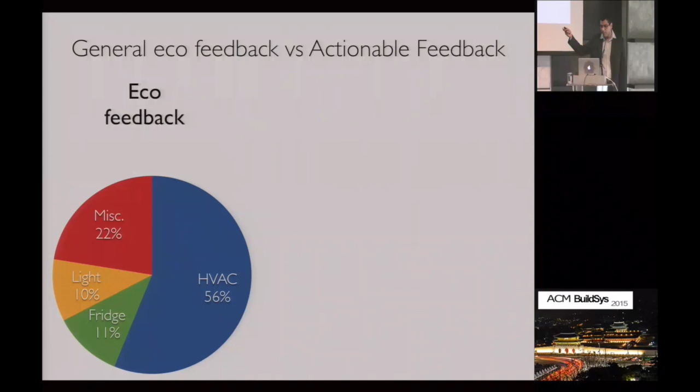Traditionally, when we talk about the feedback which NILM research comes up with, it's something like a pie chart, or the eco feedback which we see as the energy itemized breakdown. It might tell you that your fridge is consuming, say, more than your neighbor's, but does that really empower you to save on fridge energy consumption? Probably not for an average user.

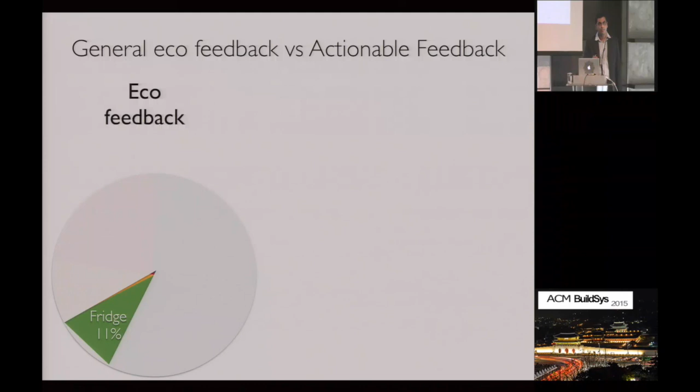What we actually need is actionable feedback, so that people don't only know about their energy usage, but they can also do something about it.

So this is the kind of actionable feedback we want to give in this work.

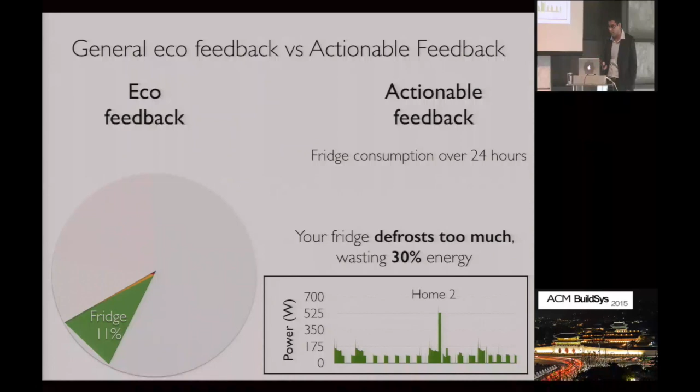When we talk about giving feedback, our basic approach is that instead of stopping at the power trace or the energy trace, we look at certain specific features from the power trace, such as the length of the duty cycles or the actual power value of any given appliance.

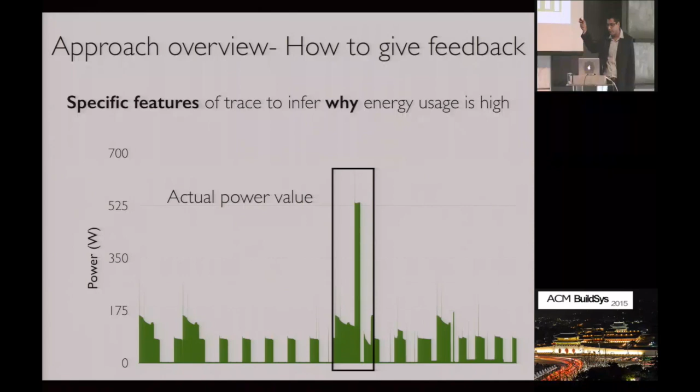I'm going to focus mostly on HVAC and fridge, because firstly, they are found in most homes, and they consume more than 60% of an average American household's energy.

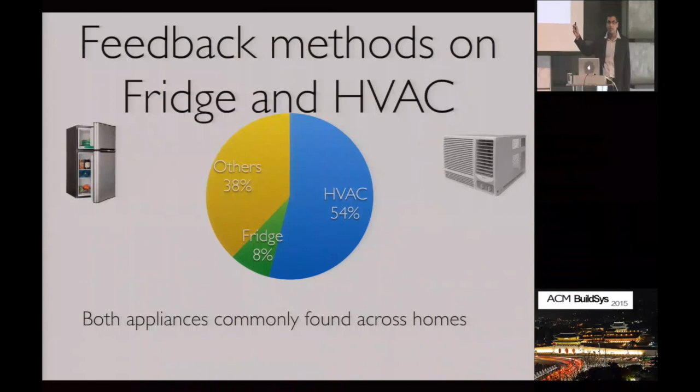The way I'm going to evaluate our work is we'll start with appliances and assume we have submetering sensor, something like the PowerBlade sensor, which many of us might have seen at Sensys a couple of days back. Based on the trace, the true appliance-level trace, we extract features to provide actionable feedback.

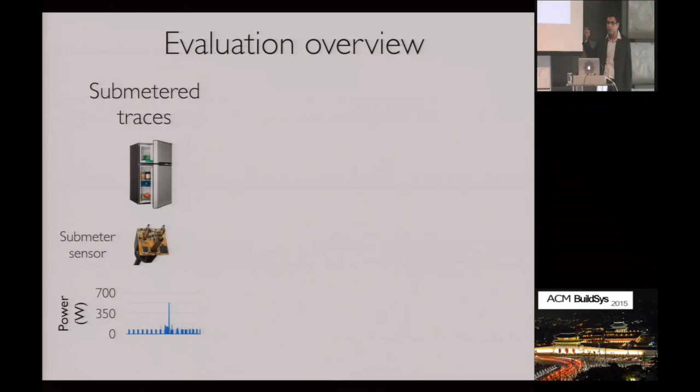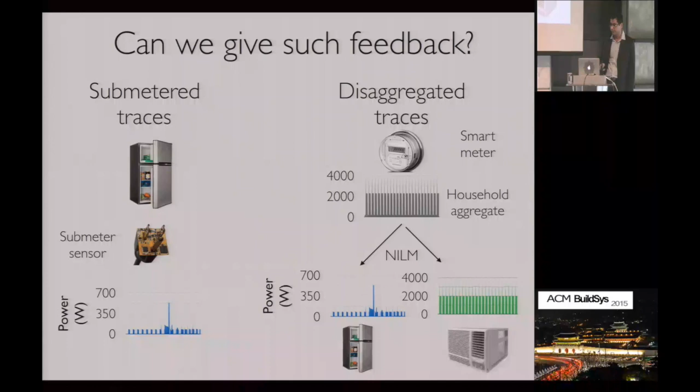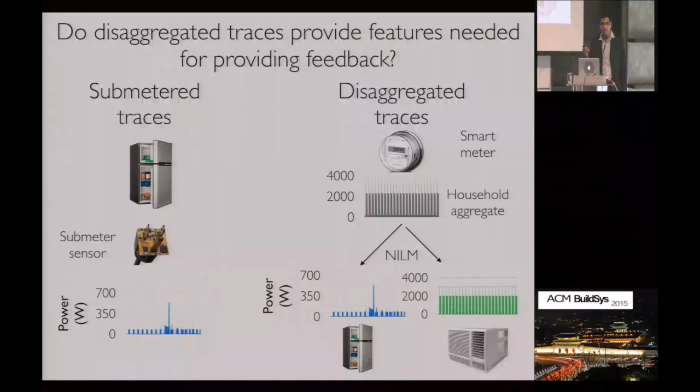Next, we use the same feedback mechanism, but instead of using metered sensors and actual power traces, we use energy disaggregation methods to break down the aggregate signal into different appliances. What we really need to answer at this stage is: do disaggregated traces provide that actionable feedback? This is the prime question we're going to answer throughout this talk.

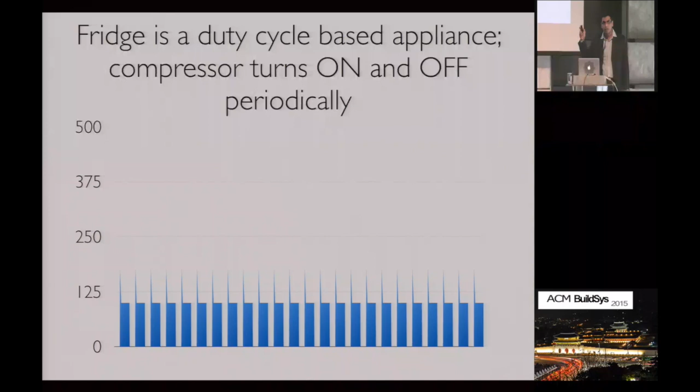Fridge, as we all know, is a very simple appliance. All of us have it. It's a compressor-based appliance where the compressor cycles on and off periodically to maintain the fridge at a given set point temperature. But there's way more to it than the simple graph we saw previously.

Every now and then, the fridge goes into something known as a defrost cycle. This is the time when the heater of the fridge turns on and removes the excess frost. Apparently, this is needed to keep the fridge running at higher efficiency.

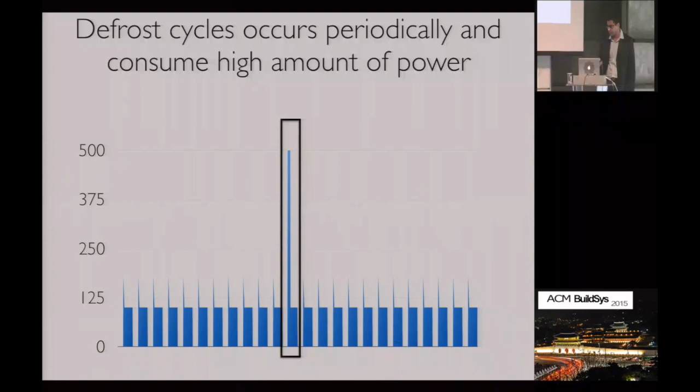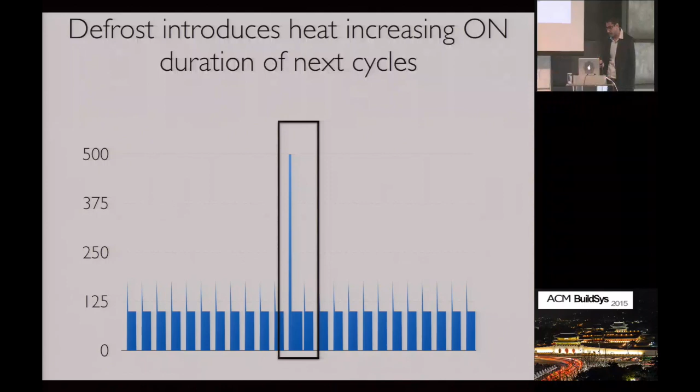But for every defrost cycle, we see that the next few compressor cycles are also affected, because defrost introduces heat into the fridge, and you then need to keep the compressor on for a longer duration. And whenever you're using the fridge — just opening and closing it, keeping groceries, keeping warm food, or kids just having fun in the home — that also ends up affecting things.

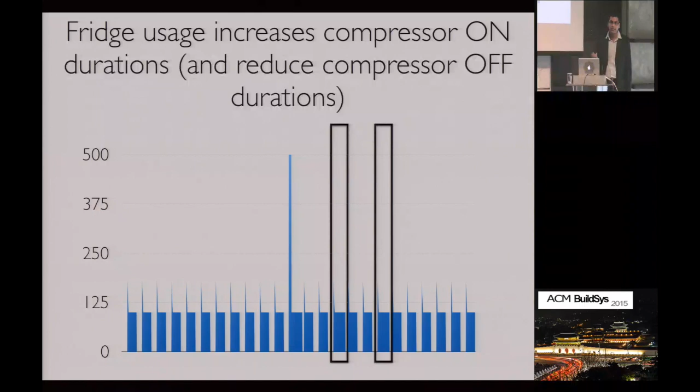Now, this is an actual trace taken from a home. This is how a 24-hour trace would look like. In the night hours, you would typically have very low usage, unless you're a night owl or you're hosting a party. We call such usage baseline usage.

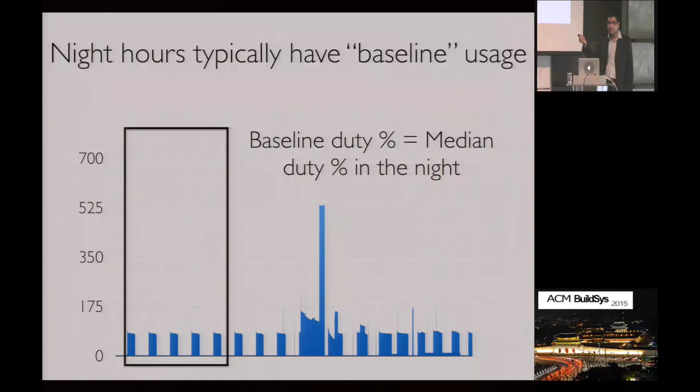We calculate the baseline duty percentage of the fridge as the median of the duty percentage throughout the night. Using the median gives us the advantage that, say, if on one night the defrost turned up unusually, our approach will still not get affected.

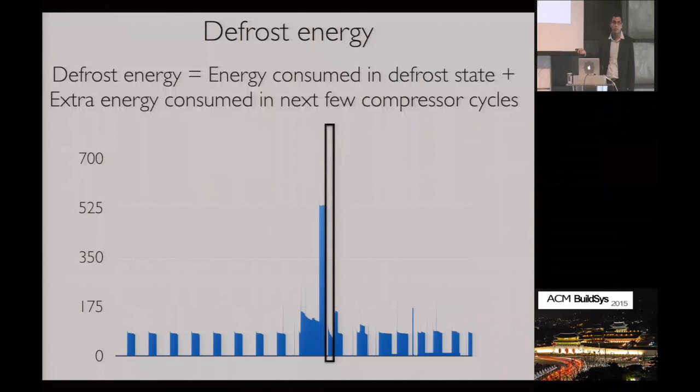When we're talking about defrost energy, there's the energy consumed in the defrost state, and secondly, the extra energy consumed, which is the extra heat that has to be removed. Talking about usage energy, this is all the extra energy over and above the baseline usage.

We use the Wiki Energy dataset, which collects data from a large number of homes in Texas, specifically Austin and other cities. We have data for 97 fridges and 58 HVAC units, for which we'll try to give some actionable feedback.

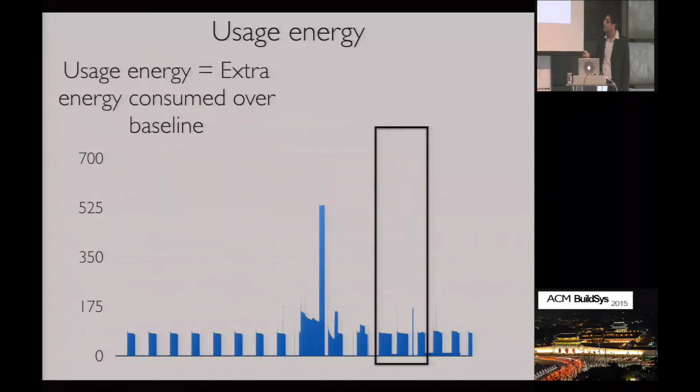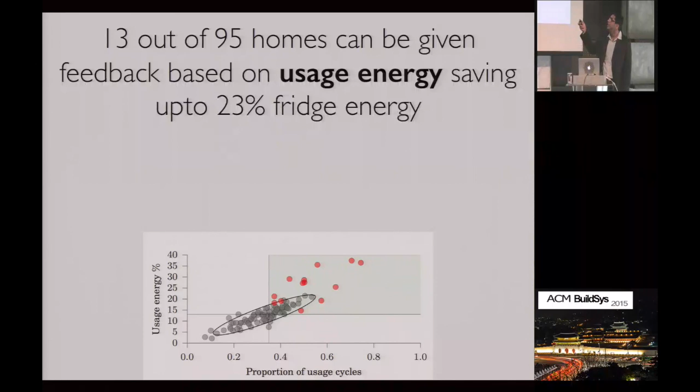But it turns out that if instead of using sub-meter traces as in the plot below, we were to use 3 different NILM algorithms, the accuracy of feedback that we get is rather poor. We can see that all these red homes, which should have ideally been in the green zone,

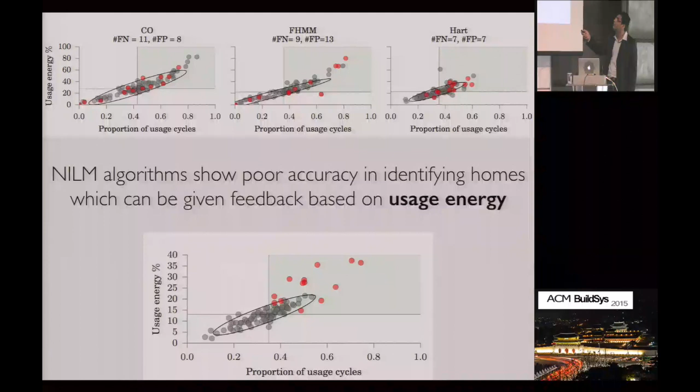are getting feedback based on the traces produced by different NILM algorithms, and there are cases where they end up getting the wrong feedback.

Similarly, for defrost, we find homes which have more than 2 defrost cycles per day. Clearly, something is wrong.

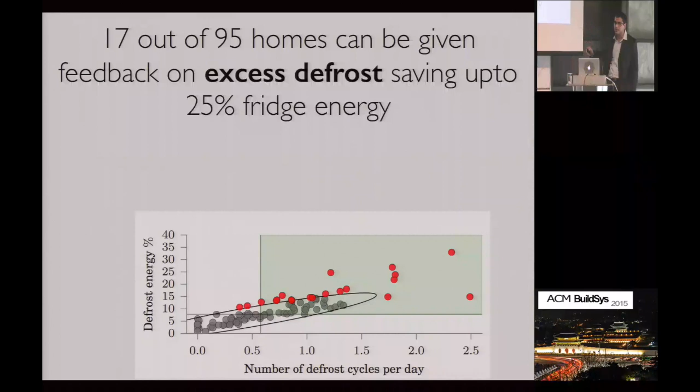But when we try to do the same thing with NILM algorithms, it turns out that NILM algorithms fare poorly. We can even make a plot to show how poor the feedback would have been.

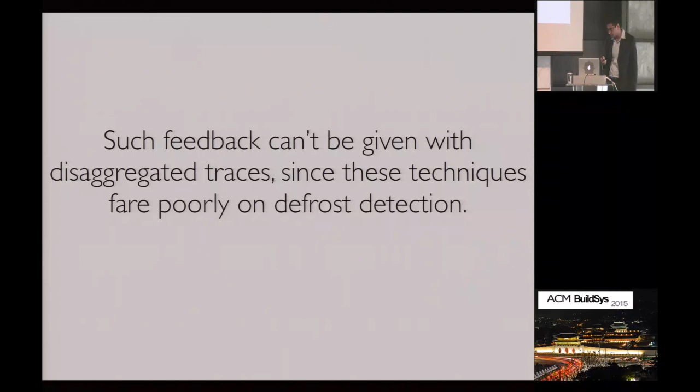Interestingly, when we use these benchmark NILM algorithms, the same ones used to achieve better or at least comparable state-of-the-art accuracies on conventional NILM metrics such as error in energy, the question really is: despite getting good accuracy on conventional NILM metrics, why are we faring so poorly in terms of the metrics we care about, or in terms of giving actionable feedback?

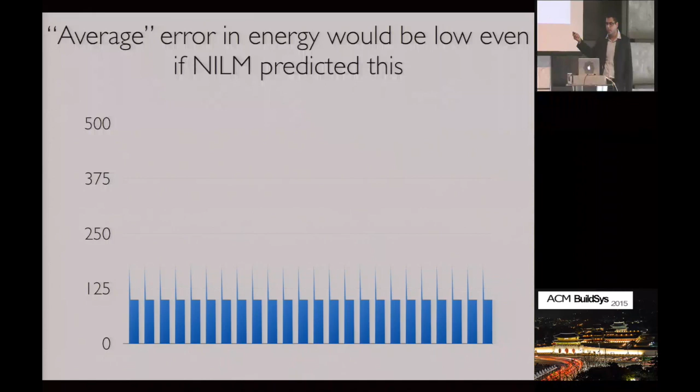It turns out that you can predict fairly well, even predict the fridge consumption something like this. But the important features which we care about incorporate a trace like this, and the features relate to the usage events. And NILM algorithms struggle with this.

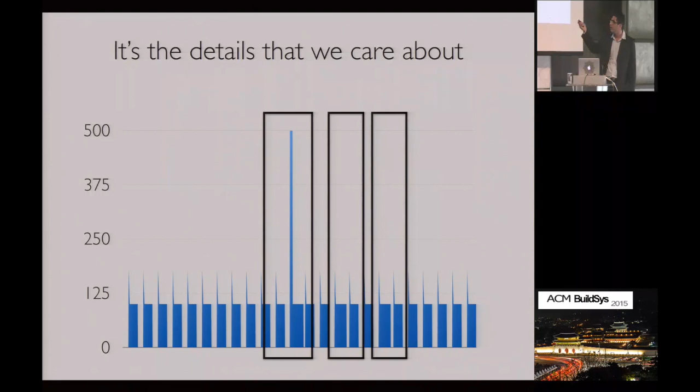Coming on to the HVAC, it's again a very similar fact that it also duty cycles, and it tries to maintain the space at a set temperature.

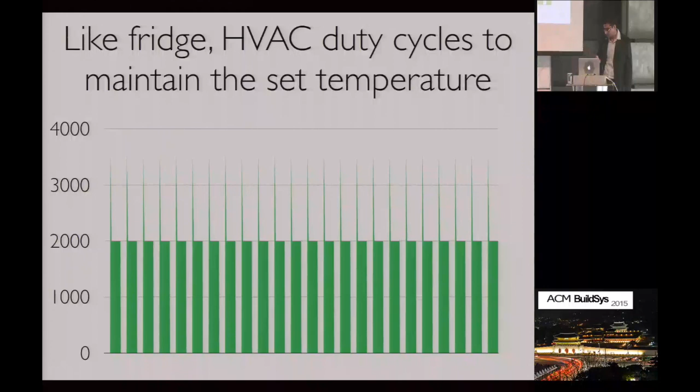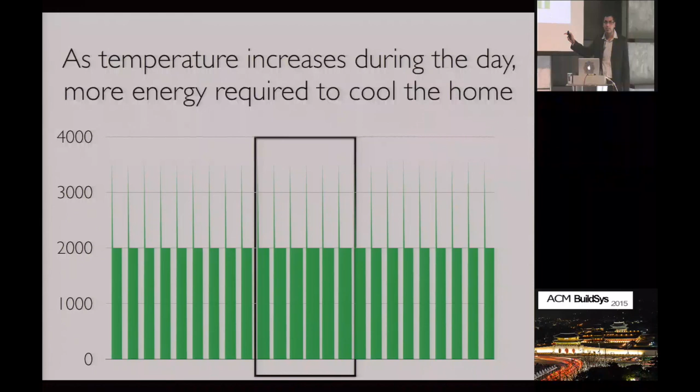But as the outside temperature increases during the day, the compressor cycles also increase in duration, because now you need to turn on the compressor for longer to remove all that extra heat which the environment is injecting in. By the way, when I'm talking about HVAC, I'm assuming we are in a hot climate, and this is the summer months, so you want to cool your homes.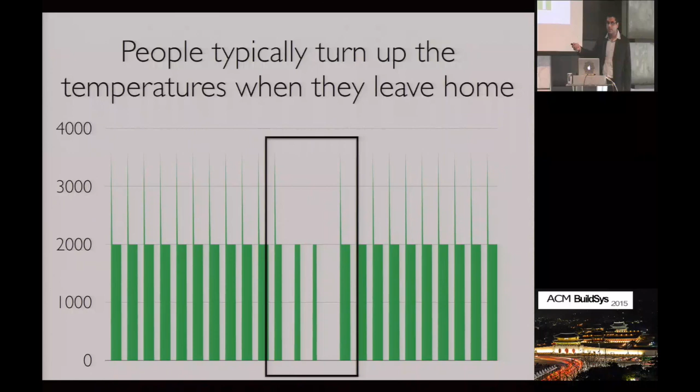It also turns out that when people leave their homes, they might increase the temperature so that the HVAC does not consume a lot of energy when they're not at home. So then you would have compressor cycles of shorter durations.

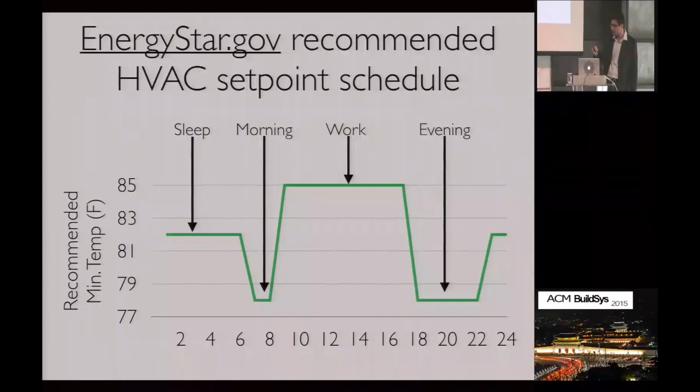In fact, there's a set point schedule for different hours of the day for programming. The goal is to be able to find homes which are not adhering to this schedule.

We decide to give feedback based on a scoring mechanism where the score varies from 4 to 0, 4 being the most energy efficient home.

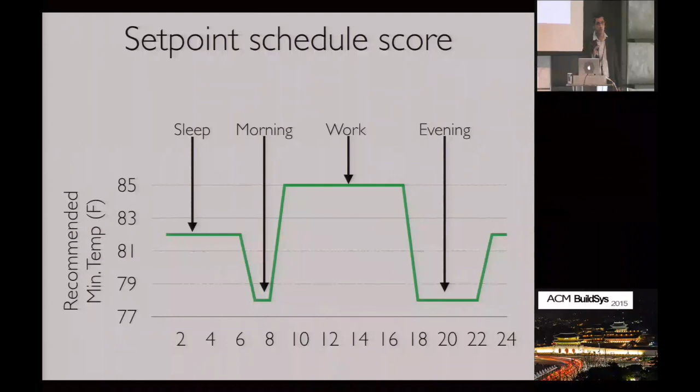The way we compute this score is: for each of these segments, we find how much above or below the recommended schedule the temperature is, and that determines the score.

For instance, during sleeping hours, the minimum recommended temperature is 82 Fahrenheit. If our temperature is more than 82 Fahrenheit, we give a score of 1. If it's below, say, 78 degrees, we give a 0. Anything in between, we give a fraction.

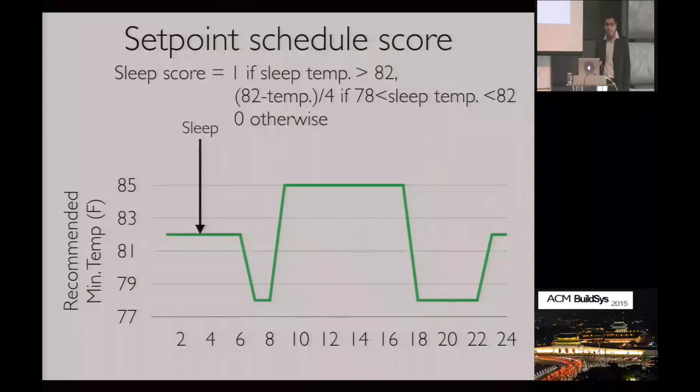So we really need to be learning the HVAC set point to provide this kind of feedback. The way we do this is that we...

...relate weather and the amount of energy that is being used. So we use a non-linear regression model with the weather information and the HVAC trace.

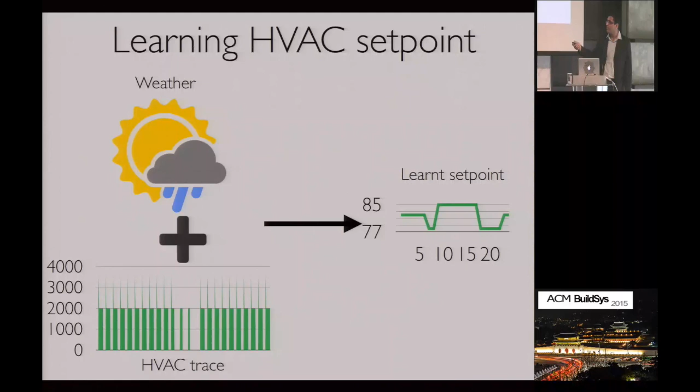When we talk about giving feedback to these homes based on scores, we use these learned set points, and we also use certain other features from the HVAC trace to be able to find out homes which don't need feedback and homes which actually need feedback.

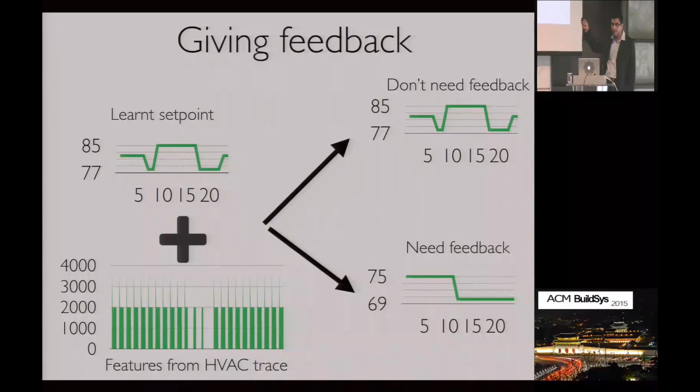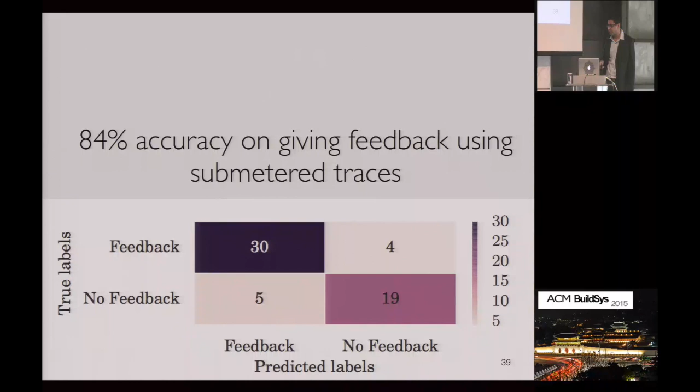...these NILM methods are performing comparable to or better than the state of the art. So why are we still doing so badly in terms of the feedback?

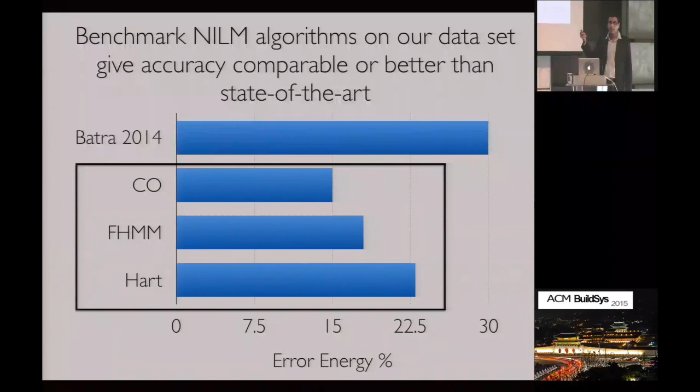It turns out that one of the important features was the number of minutes of HVAC usage.

This makes sense because in the morning time, you want your HVAC to be turned to a higher temperature so that when people are leaving for their offices, they don't consume a lot of HVAC energy.

It turns out that for the night hours, the error in prediction of minutes of HVAC usage is pretty low. In the morning, it's pretty high. So at night, it's only the HVAC and the refrigerator which are typically being used, and you get good accuracy in...

...predicting HVAC usage. But in the morning, you have all the appliances, toaster and others, working simultaneously, and thus the error increases on the disaggregation for the morning hours.

But it turns out that in Texas, we get good accuracy in terms of the conventional metrics.

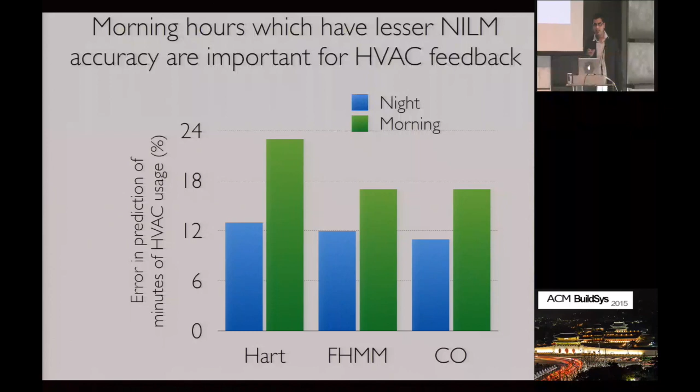To conclude, we started with the question of whether we can improve outcomes if we are measuring energy usage accurately. It turns out that we can actually improve things, at least given appliance level data traces.

We saw that we can get up to 84% accuracy in terms of identifying homes which need HVAC feedback. We were also able to find homes which need feedback based on the fridge defrosting too much or the fridge being used too often.

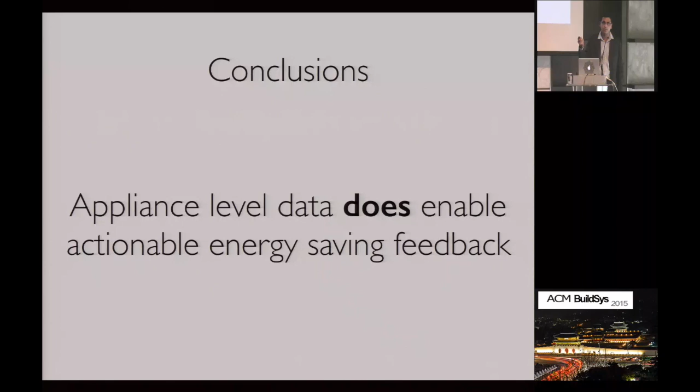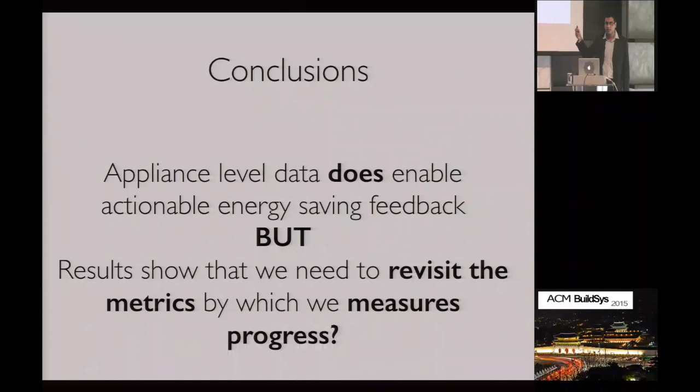But it turns out that our results show, contrary to expectations, that we really need to reconsider how we are measuring the progress of the NILM community, because conventional metrics do not provide the valuable features which we need for providing actionable feedback.